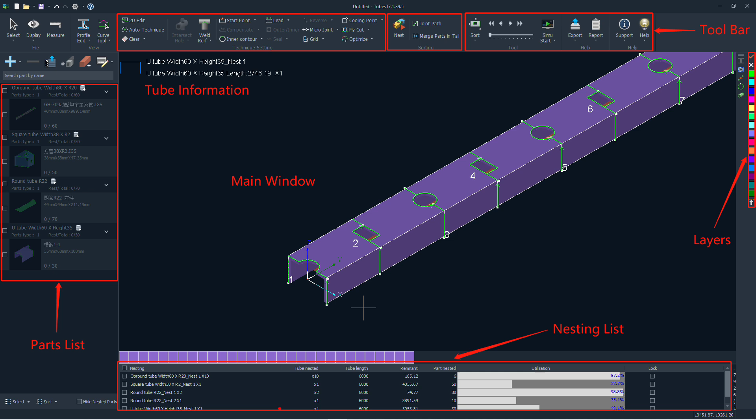This video is divided into 5 parts: import, process, nest, sort, and export respectively. The first we are going to talk about is import. After entering this software, the first thing we need to do is edit the parts.

Here are some common approaches to do that. Usually, we choose to draw a part manually. Click this option, and you will be led to a new page to finish the part drawing.

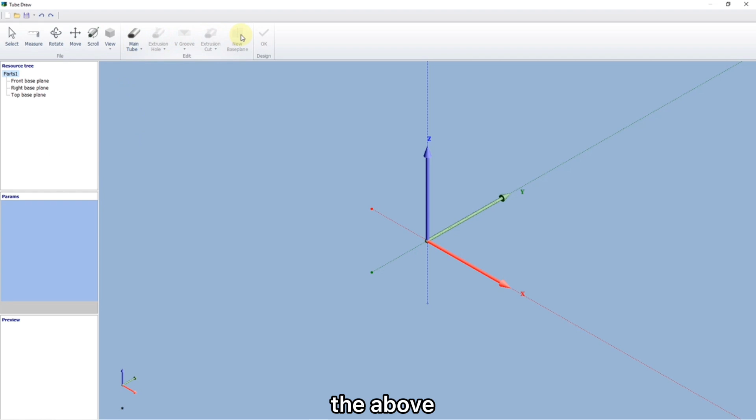The above are some important functions, and we will talk about them in detail in the near future.

Click Main Tube. You can select any shape listed here you want. And in this blank, you can change the key parameters like length, thickness, and so on.

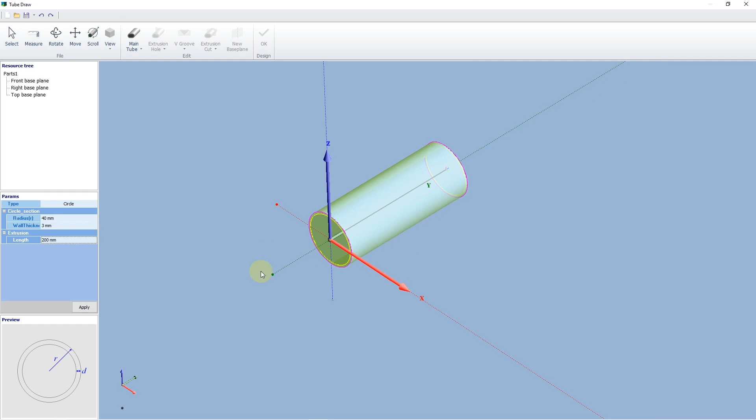Also, it supports you to add a subtool with a designated shape. You are allowed to realize different effects by changing the parameters here.

Click OK to save the change, and then we add a part into TubesT.

And there are other ways to import the parts. For example, you're allowed to import IGS and SAT files if the part has already been finished in other software.

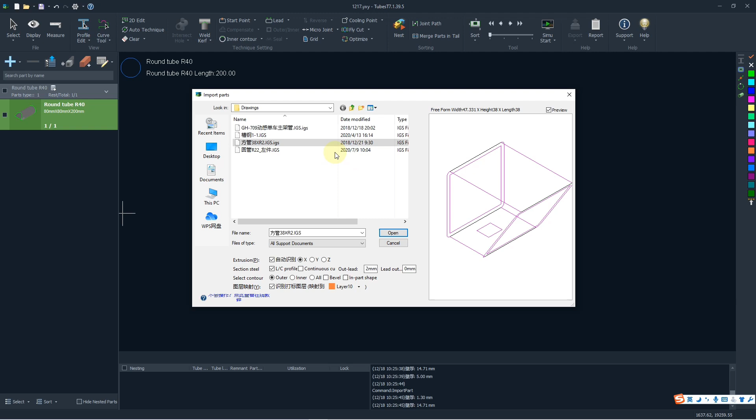Click the file, there will be its preview over here. And you can also multi-select the files by holding Shift or Control.

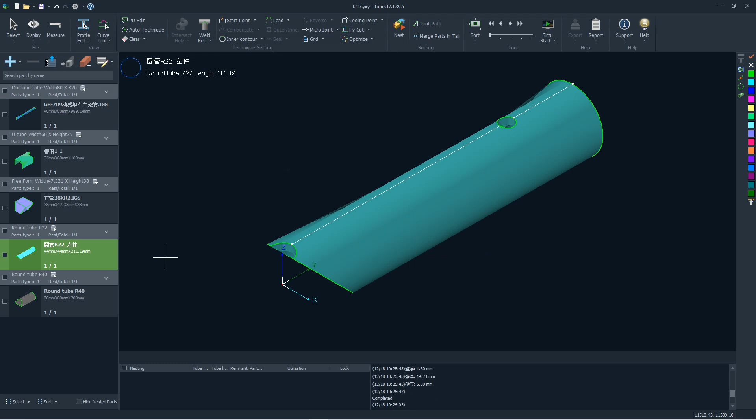And all parts selected will be imported at one go. You can browse the parts respectively to check if they are imported correctly.

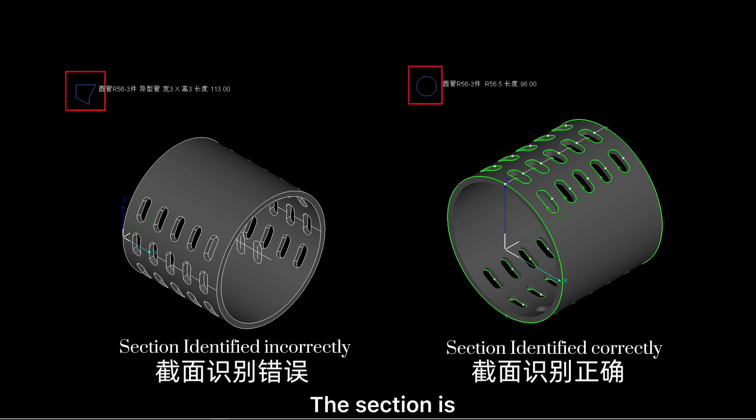To ensure that, you need to get 3 things covered. The section is identified correctly. Extrusion direction is along the y-axis. Cutting path is reasonable; generally, you need to check if there's no redundant cutting path.

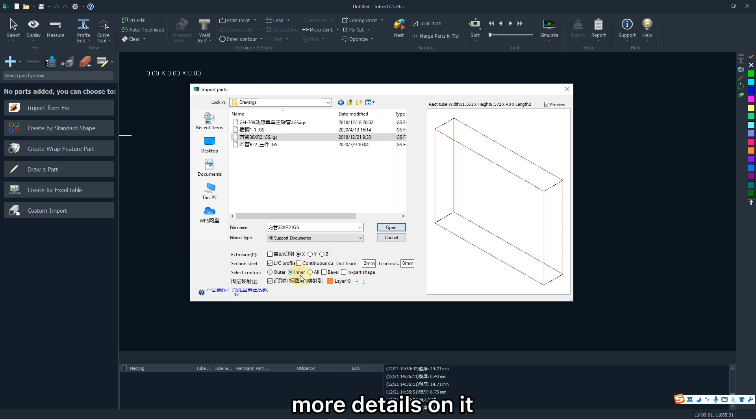If the part imported cannot meet the requirements above, maybe there's something wrong in the imported interface. More details on it we will talk about in the near future, and you can also contact us by email if necessary.

As we can see, the parts imported are listed on the left side in different sections with their previews. At the bottom, there are some convenient functions.

Click the corresponding icon. The parts will be displayed in the main window, in which you are allowed to rotate the scroll wheel to zoom in or zoom out.

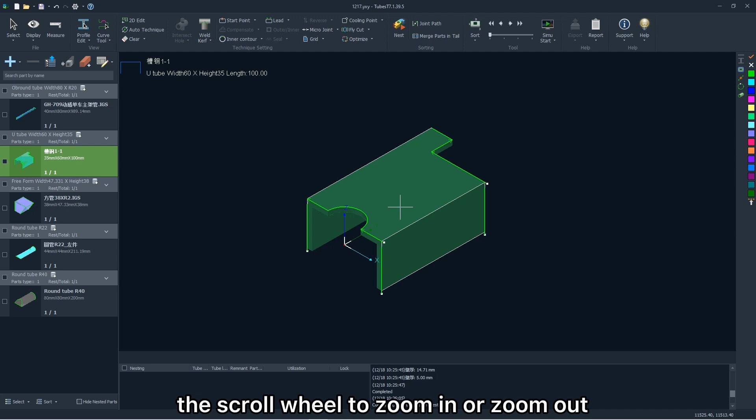Press the middle mouse button and move the mouse; you can adjust the view randomly. Press F3 to adapt the window, and press F4 to restore the default view.

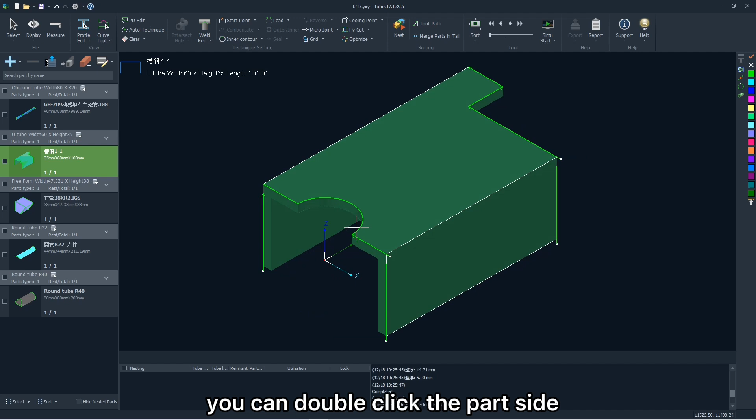Also, to change its view faster, you can double-click the part side and then select any one you want.

Hold the middle mouse button and move the mouse to track the part position in this window.

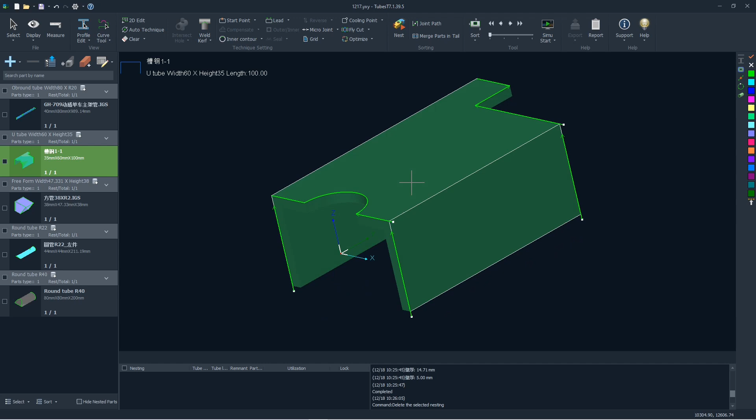Press Shift and rotate the scroll wheel to spin it slowly. Press Shift and the middle mouse button to spin it a little faster. Press Ctrl and rotate the scroll wheel to spin it even faster.

Besides, you can click Display to modify the visual effect. Also, the interface skin and language are changed here.

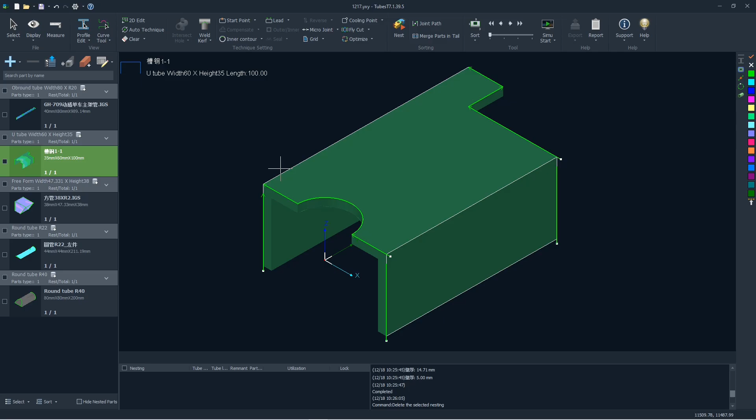Next, we are going to talk about the process, which has the capability to change the cutting path or direction by adjusting parameters like speed, gas, or something else in the cutting software.

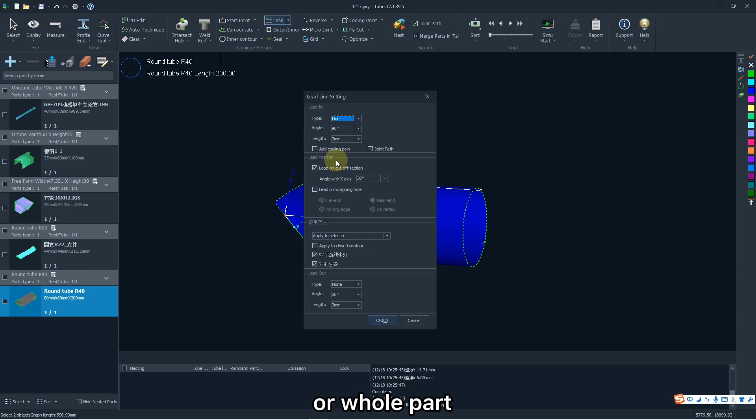I will talk about some of the most common processes, like lead lines. Click a specific cutting path or whole part, then select lead lines and make some changes here. Click OK to generate the designated lead lines.

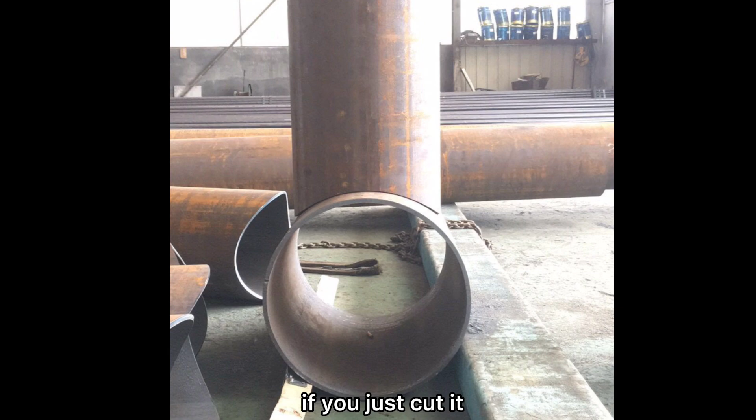And also compensation for special parts to be jointed into a T-shape like this. If you just cut it according to this kind of cutting path, there will be interference due to the differences between the inner and outer contours.

To solve it, we can add a weld kerf here. Then Tubest will automatically generate a special cutting path to offset the interference.

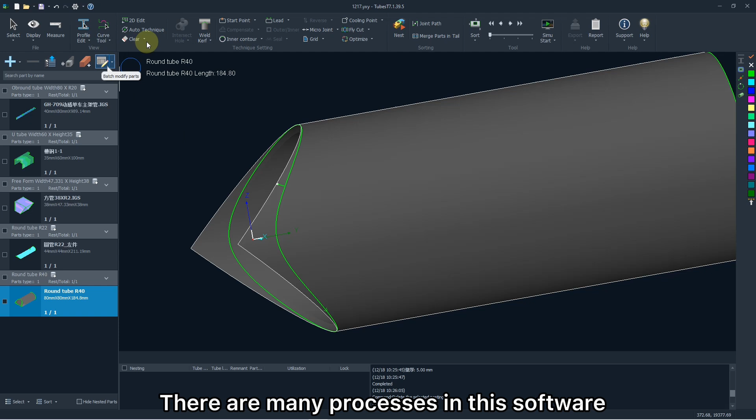And besides, there are many processes in this software. You can enable specific ones in auto technique. Tubest will remember these settings in the future and will apply them on the parts imported or received. We will talk about it in detail before long.

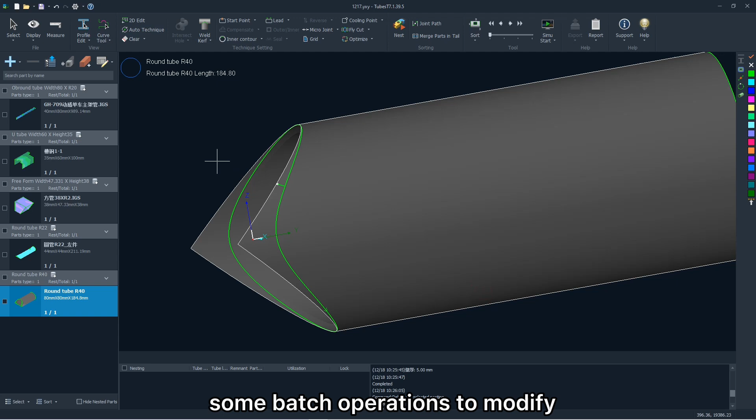Auto nest plays an important role in Tubest. Before that, we can make some batch operations to modify the part's name, amount, and add text wrapped on the tube automatically.

And you are allowed to make some changes here.

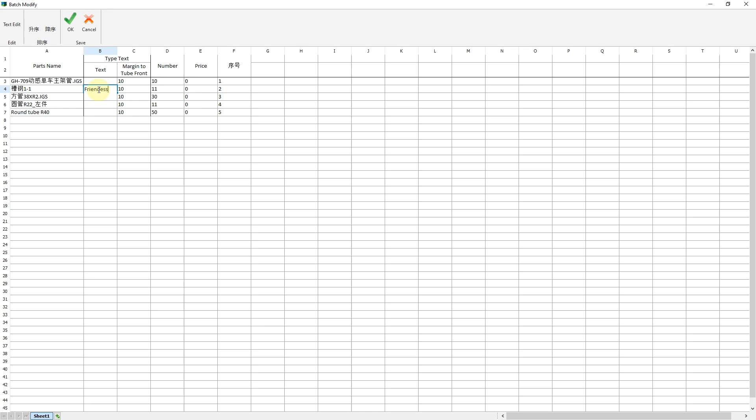Moreover, you're allowed to change them by clicking here. And also copy or even re-edit the part.

For special parts like I-shaped ones, there may be interference in the cutting path.

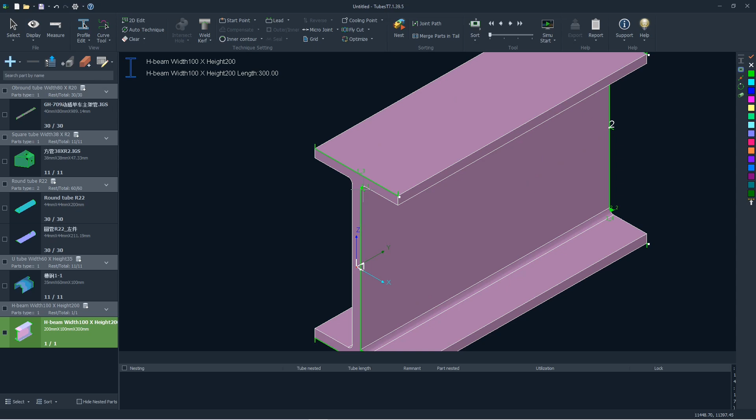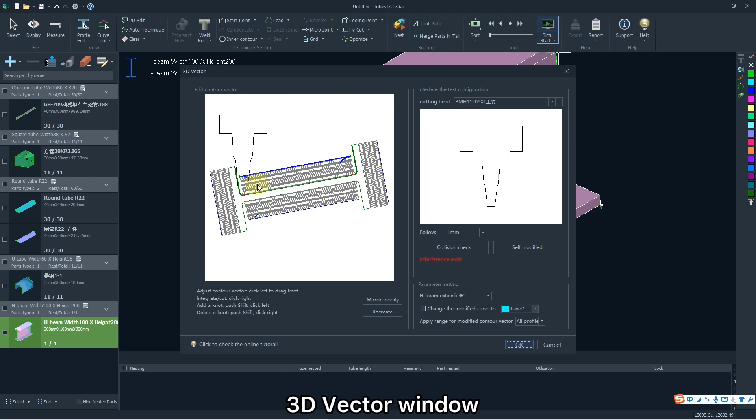If you simulate it directly like this, Tubest will give you an error notification. Click OK to enter the 3D vector window. Here you can have a collision check, and you can choose self-modified or not according to the actual result. But if you don't, the 3D vector will be modified automatically and correctly.

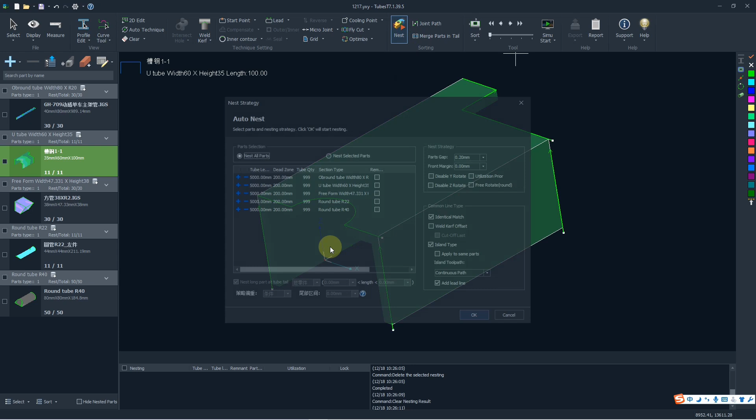Click Next. In the pop-up window, here is the tube information, including the length, dead zone, amount, section type, and remnant.

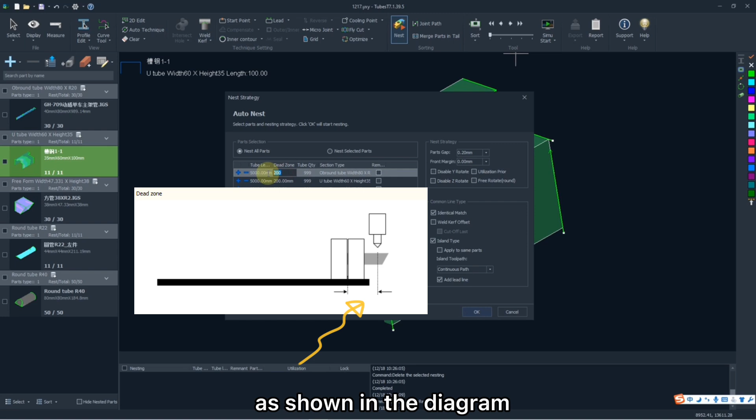Among them, dead zone means the tube length which cannot be cut, as shown in the diagram. It is necessary to get it right.

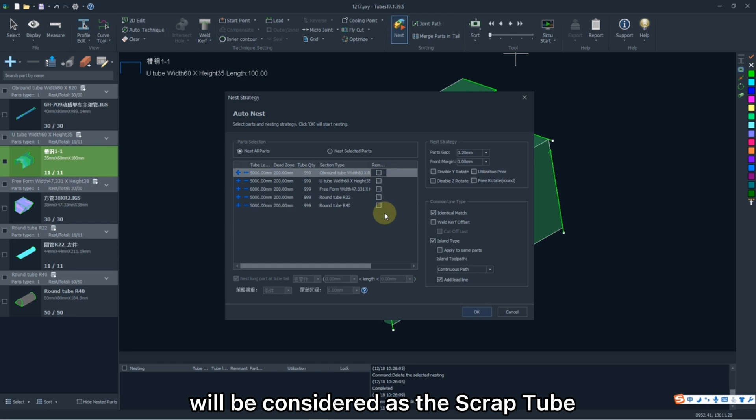The tube amount is suggested to be sufficient enough so that the parts can be nested completely, and the parts with different sections will be nested on different tubes. If you enable this remnant option, the corresponding tube will be considered as the scrap tube, which will be nested in the first priority.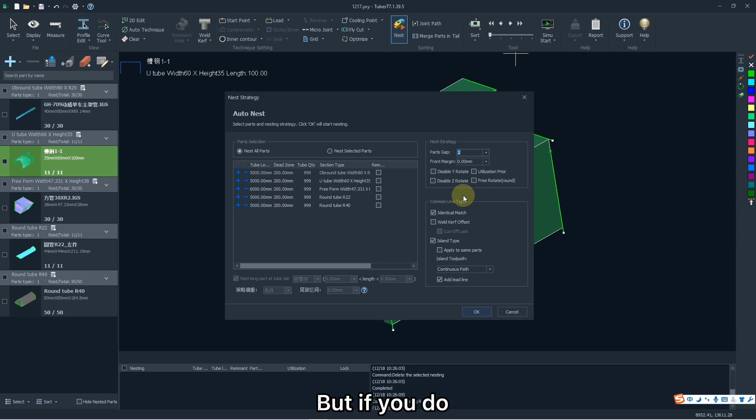On the right side, part gap means the interval between every two parts if you don't enable common line. But if you do, this parameter will be invalidated by default. Generally, you are suggested to enable identical match.

As for the other functions, today we are not going to describe them in detail due to the limited time. Click OK to start AutoNest.

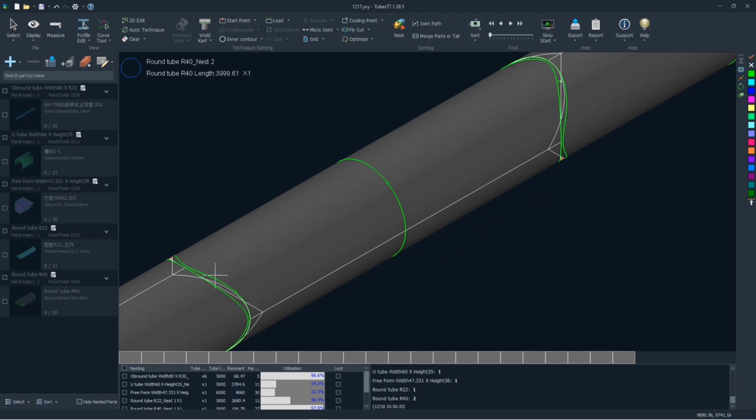Here you can see that the part without common line has an interval, which we set just now, and the part with common line, this option is disabled.

The bottom is the nesting result zone, including some main information in which every line corresponds to one kind of nesting result. Double-click it to have a check.

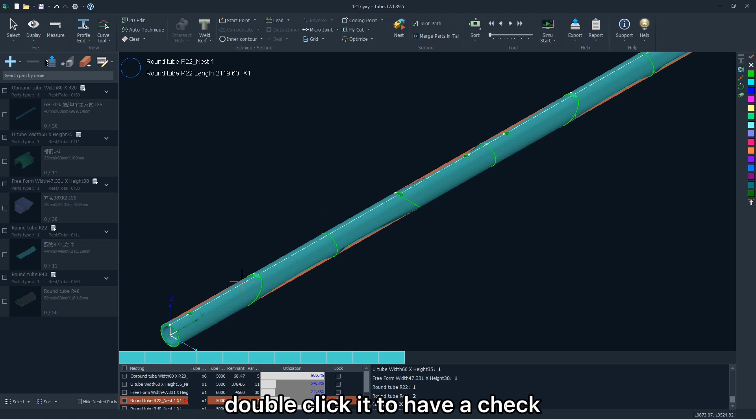Here you can see the nesting name, which is the same as that of the files imported, including the section type, size, fillet, and cutting time. Cutting time means the time the parts will be machined.

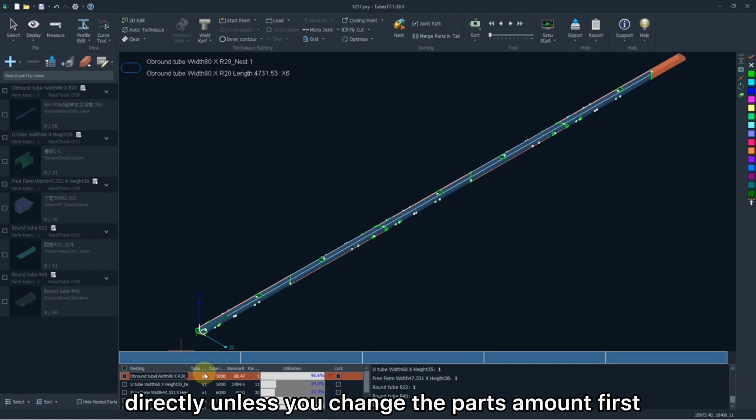Theoretically, it cannot be modified directly unless you change the parts amount first, so it is unnecessary for you to calculate the cutting time of the nesting result by your own. Also, the tube length, parts amount, and some details will be shown here, and you are allowed to change the blanket size manually.

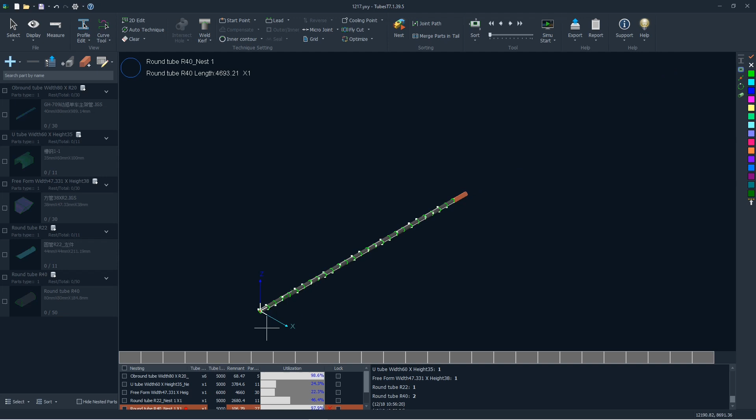If you are not satisfied with the current nesting result partially, double-click a specific part. There will be some operations here to adjust it, like move forward and backward, or rotate it in clockwise or counterclockwise direction. More details about the nesting strategy will be introduced particularly in the future.

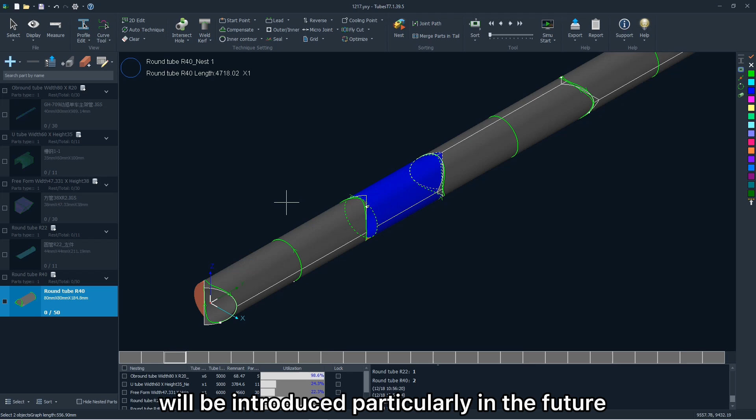The next is sort. Theoretically, Tubest will sort the cutting path automatically from the top to the tail of the tube, but you are allowed to sort it according to different strategies.

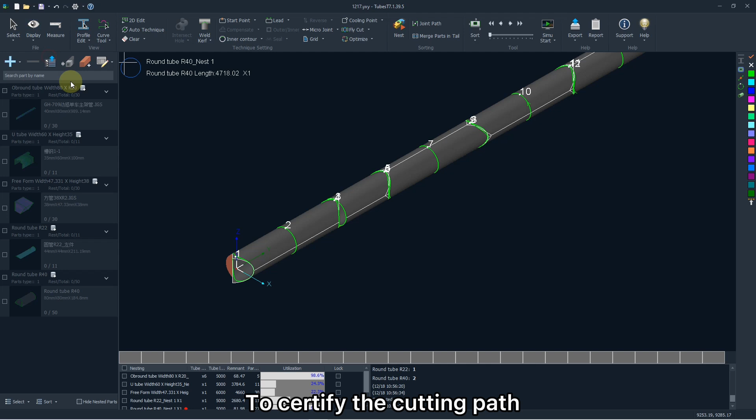To certify the cutting path in present is reasonable, click here to enable the Display Sequence tag to check the cutting sequence.

Statically, you can click the inner arrow to verify every cutting path manually. Yellow means they're certified, blue the current, and green the to be certified.

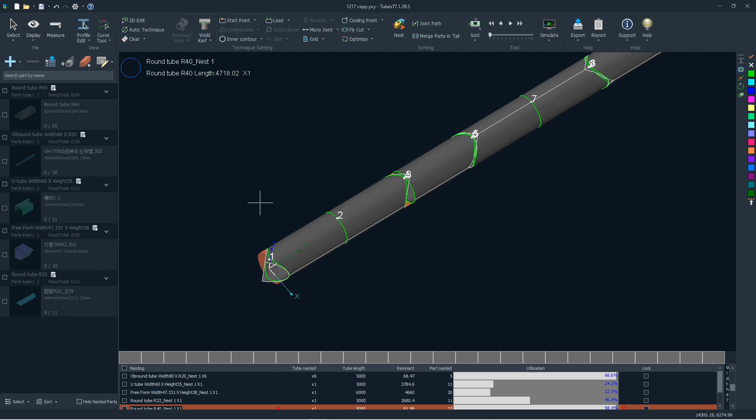Dynamically and more virtually, you can click Simulate Start to generate a virtual cutting head, which can be customized to simulate the actual cutting. Also click the Alt arrow to adjust the simulating speed.

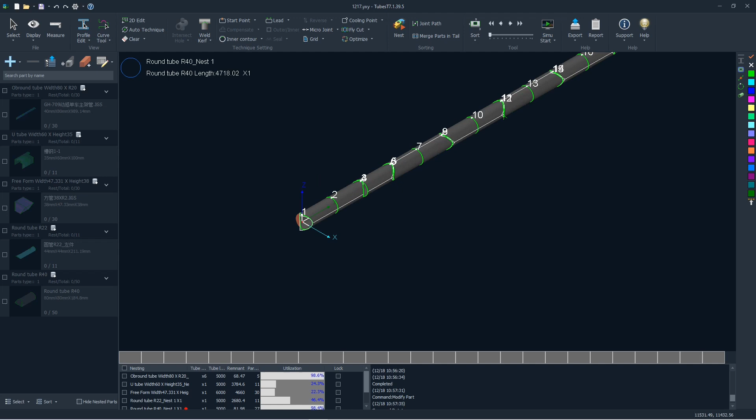If you select one or a group of cutting paths, this specific part will be simulated only.

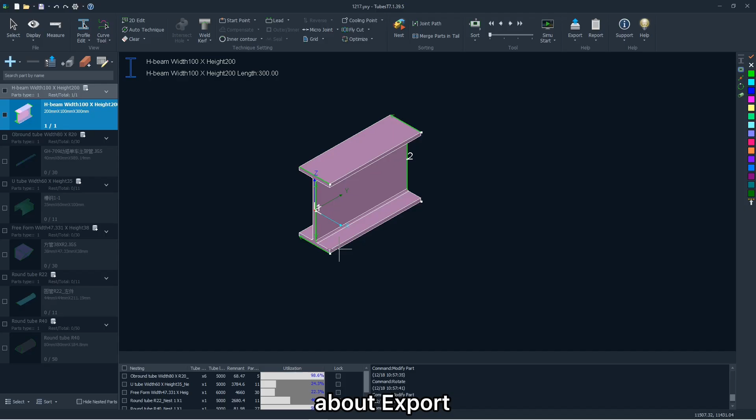Next we are going to talk about export. Click this icon on the left top of the interface.

TubesT will export a file in YXY format, which is not used for cutting software, but is an engineering file for nesting. It will save all the results nested, parts imported, and the processes added.

If you want to modify it slightly, like changing the cutting path partially, just open this file, which is able to save much redundant operations. Then you're allowed to continue the editing saved at a later time.

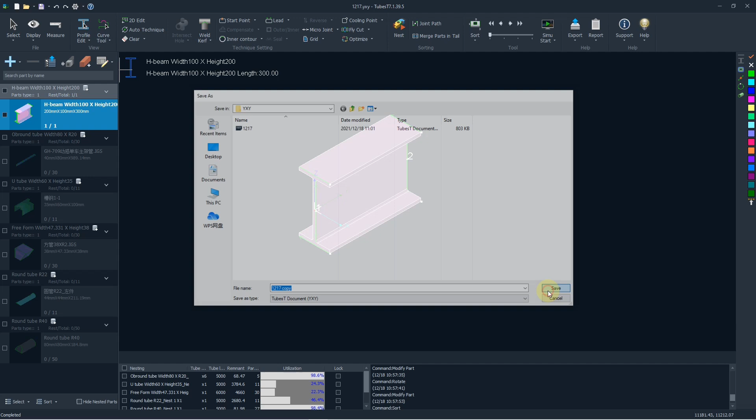Also, you can right-click the nesting result and click Export to generate specific files.

ZX for Tube Pro, CTDS for SideTube.

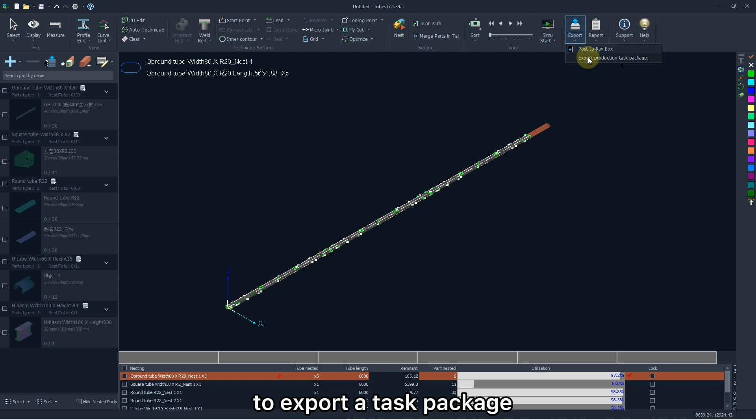Besides, you can click here to export a task package, including a group of files in ZX format. But it is necessary for you to use the Tube Pro in the corresponding version to TubesT.

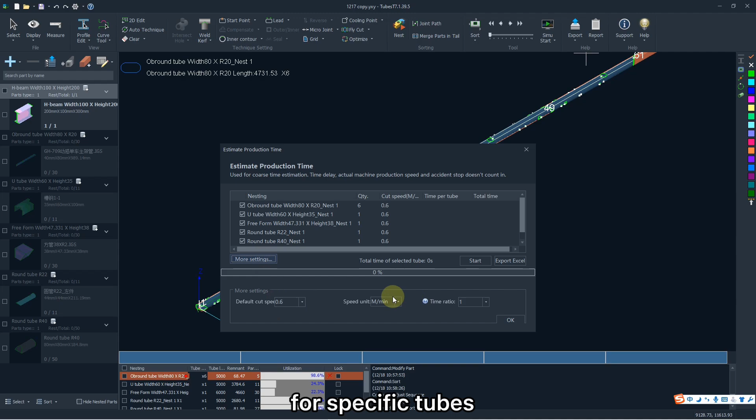And you can also check the time estimate for specific tubes. Parameters here can be customized by yourself.